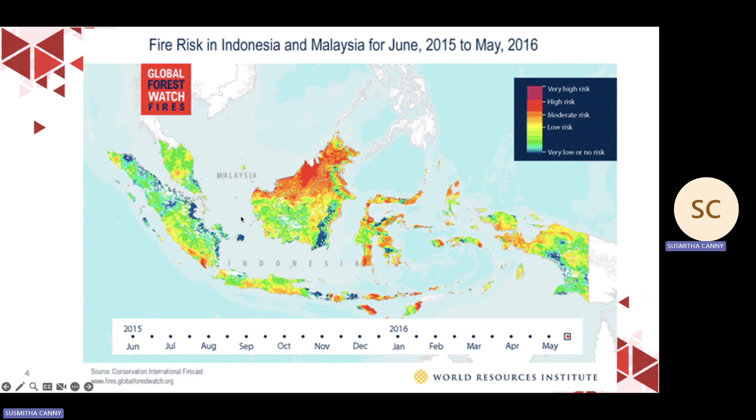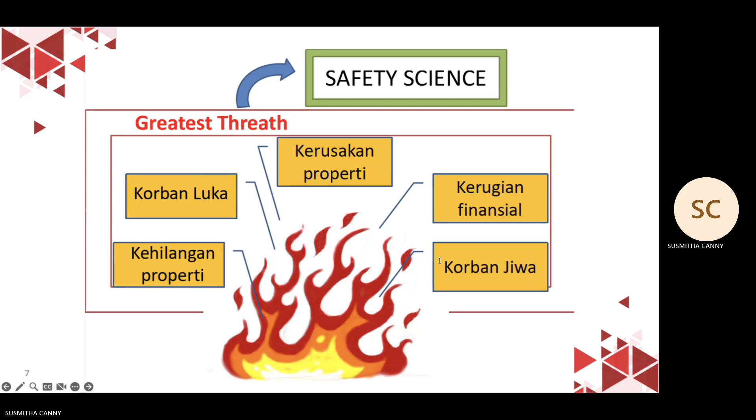From this slide, we learn about fire prevention, as prevention is better than extinguishing. Fire prevention involves taking measures to reduce the likelihood of a fire occurring, and the main focus of fire prevention is identifying and controlling hazards before a fire starts.

There are some fire prevention measures. The first is risk identification: identifying heat sources, flammable materials, and environmental conditions that may trigger a fire. The second is equipment maintenance: ensuring electrical equipment and machinery are in good condition to prevent short circuits.

The third is safe storage of flammable materials, by storing chemicals and flammable gases according to safety procedures. Then employee training, of course: educating workers on fire hazards and how to prevent them. And lastly, developing safety SOPs, by establishing safe work procedures for tasks involving heat or open flames, such as welding.

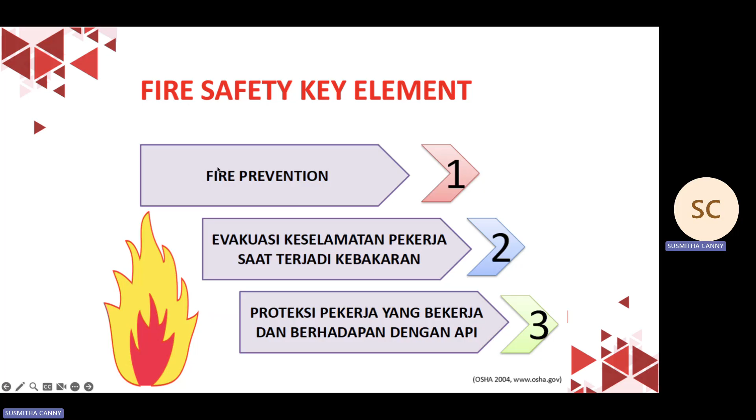So the conclusion from this slide is fire safety is not just about extinguishing fires, it's about preventing fires, ensuring safe evacuation, and protecting workers who face fire hazards directly. By implementing these three key elements, we hope that fire risk can be minimized and workplace safety can be better ensured.

And this is how we did fire prevention. In this module we have four topics. The first one is fire prevention and protection. The second one is fire control hierarchy, like we already talked before about occupational safety and health hierarchy. The third one is the OSHA fire prevention plan. And the fourth one is the fire triangle and tetrahedron.

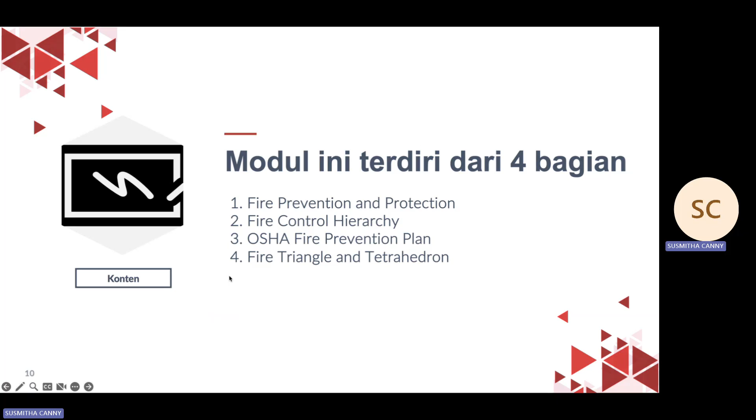We will discuss the essential aspects of fire safety: the first is fire prevention, then fire protection. Fire prevention is the effort to prevent fire from occurring in the first place. The main goal of fire prevention is to eliminate factors that can trigger fire. Based on the physics and chemistry of fire, a fire can only occur if three key elements are present, known as the fire triangle: oxygen, heat, and fuel. If one of these elements is removed, a fire cannot ignite.

However, in practice, fire prevention is not always 100% effective. Therefore, we need to understand several fire prevention measures recommended by NFPA in 1997, which include these prevention methods. However, as seen on the slide, fire prevention alone cannot 100% guarantee that fires will never occur.

That's why we also need to understand the concept of fire protection. While fire prevention focuses on preventing fires, fire protection is an integrated system to handle fires that cannot be prevented. Fire protection includes all actions taken to control, contain, and extinguish fires once they occur.

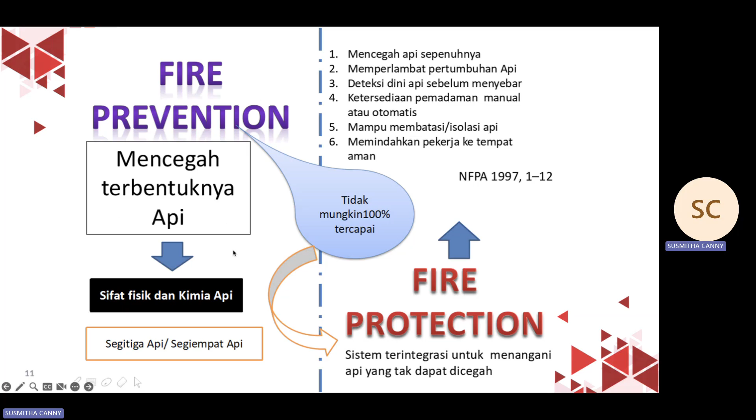This is the hierarchy of control for fire risk, like we already talked before. This can also be used for fire. Actually, this is the hierarchy of occupational safety and health. The most effective is elimination, then substitution, engineering control, administrative control, and PPE.

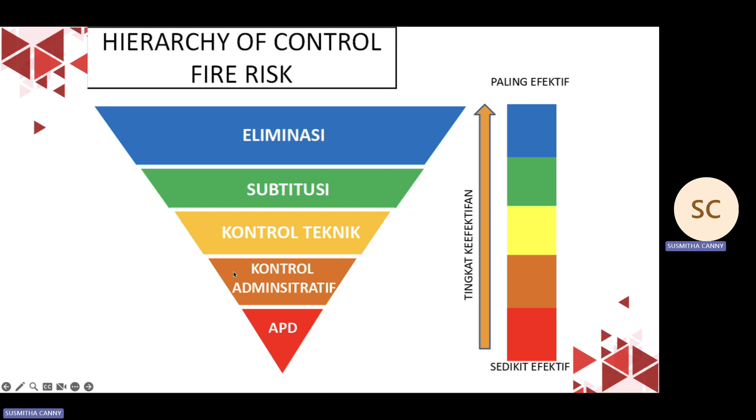On this slide we will discuss the key elements of the fire prevention plan according to OSHA. The fire prevention plan is crucial for ensuring workplace safety and reducing the risk of fires that can cause significant losses. The first thing we need to do is list major fire hazards. This is the first step in fire prevention planning: identifying the potential hazards that could cause a fire.

The second step is procedure for controlling flammable waste. One of the causes of fire is the accumulation of flammable waste, so there must be a clear procedure for managing such waste, such as providing designated storage areas, using sealed containers, or disposing of waste regularly. The third step is designating personnel responsible for equipment maintenance to ensure that fire protection systems function effectively. The fourth one is designating personnel responsible for fuel management, since in addition to equipment, fuel must also be properly managed.

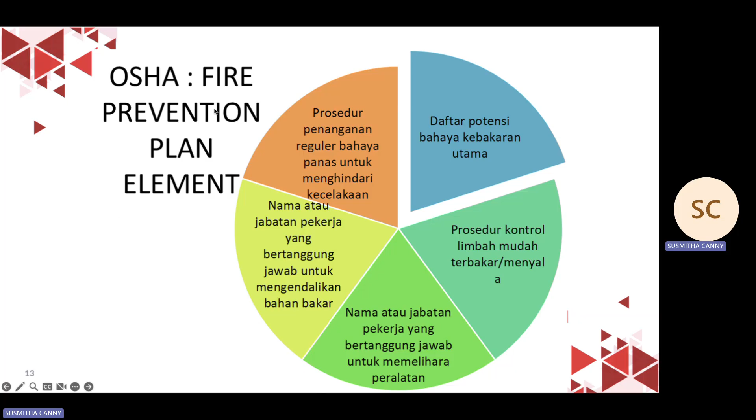This organization recommends that specific personnel be responsible for storing fuel, regulating the amount of fuel, and ensuring there are no leaks or spills that could ignite a fire. The last one is regular handling procedure for heat hazards to prevent accidents. Lastly, the fire prevention plan must include procedures for handling heat sources, ensuring hot tools like welding equipment and stoves are used safely, keeping a safe distance between heat sources and flammable materials, and also providing training for workers.

Before we dive deeper into the elements of the fire prevention plan, let's first understand the fundamental concept of how fires occur. In ancient times, fires were explained using the fire triangle concept. As I already talked about before, it consists of three main elements: oxygen, heat, and flammable fuel.

But right now, in recent years, it's recognized as the fire tetrahedron, which adds one more element: chemical reactions. The fire tetrahedron consists of oxygen, heat, fuel, and chain chemical reactions. This chemical reaction is what sustains the fire. So even if we remove fuel or oxygen, but the chemical reaction continues, the fire may still burn or spread.

This image explains combustion as an oxidation reaction that produces heat, flame, and smoke. Simply put, combustion is a chemical reaction between fuel and oxygen, releasing energy in the form of heat and similar effects. There are also factors affecting combustion, like the state of the fuel, combustion rate differences, and choosing the right fire extinguisher.

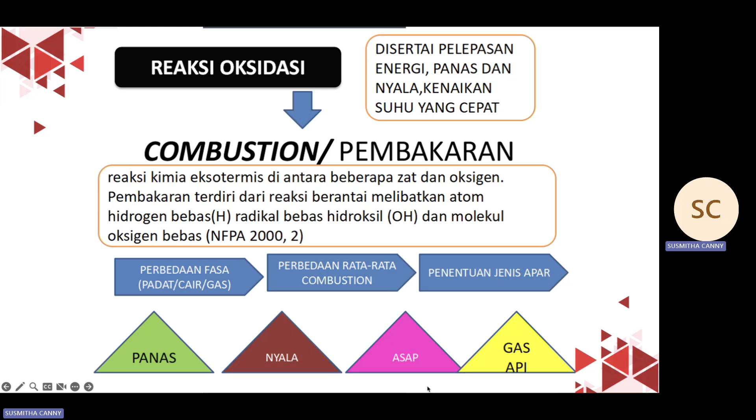As maybe you know, a wet cloth can be used to extinguish fire. How does a wet cloth do that? It's because it blocks oxygen, since oxygen is part of what causes a fire. Fire requires oxygen to keep burning, and a wet cloth acts as a physical barrier, cutting off the oxygen supply to the fire and stopping the combustion process.

Another reason is that the wet cloth can absorb heat. This method is effective when the fire is small and the fire source can still be fully covered by the wet cloth. For clothing fires, a fire blanket or wet cloth can help prevent further spread. It will not be effective if the fire is too large, or for chemical or electrical fires, large oil fires, or chemicals in dangerous places with hot oil. So the conclusion is a wet cloth can reduce oxygen and absorb heat, but it should be used cautiously depending on the type of fire.

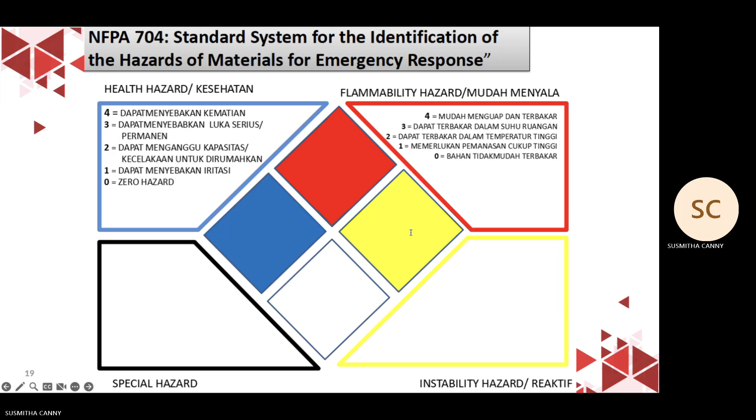The next topic is fire control, how we control fire by using a standard system for hazard identification. This is from the NFPA. They have a standard system for identifying chemical hazards in emergencies. They have four colors, and each color represents a different type of hazard, representing the level of health risk posed by the material. This is how we do fire control.

This is how we do the fire tetrahedron concept. They explain that fire can ignite and sustain itself due to the presence of four main elements. To extinguish a fire, one or more of these four elements must be removed. Below are some fire suppression methods based on the fire tetrahedron concept: water spray, carbon dioxide, dry chemical, and fire break.

For water spray, it works by cooling the heat and reducing the temperature around the fire. Additionally, water vapor can help lower the oxygen level around the fuel. For carbon dioxide, it works by displacing oxygen from the fuel surface. For dry chemical fire extinguishers, they disrupt the chain chemical reaction that sustains the fire. For fire cuts in a forest fire, this technique involves removing combustible fuel to prevent the fire from spreading further.

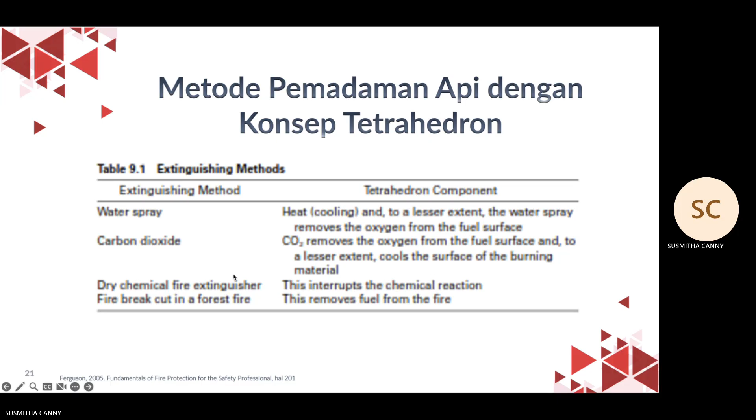This is some classification of fire based on NFPA material. Each type of fire requires an appropriate extinguishing method. There are classifications A, B, C, D, and K. For class A, ordinary combustibles, they can only be extinguished by water.

Class B, flammable liquids, can be extinguished using carbon dioxide. For electrical fires, you can only use carbon dioxide, and do not use water because it can cause electric shock. For class D, you can use a special dry powder to cover the fire and isolate oxygen, and also do not use water because some metals may react explosively with water.

And for the last class, K class, cooking oils and fats, you can use a wet chemical to extinguish. As with the previous one, do not use water because it may cause splattering and worsen the fire.

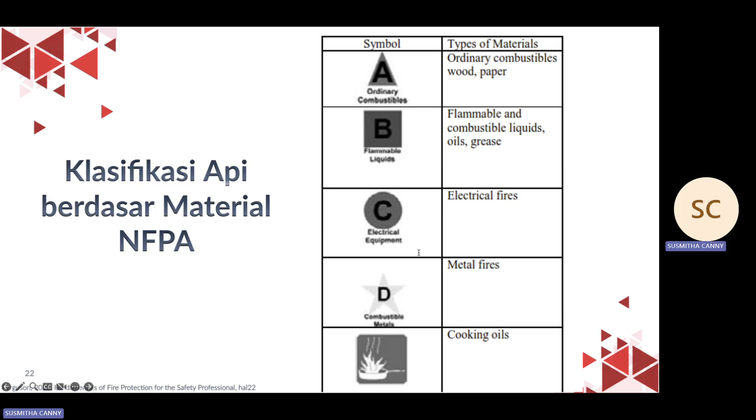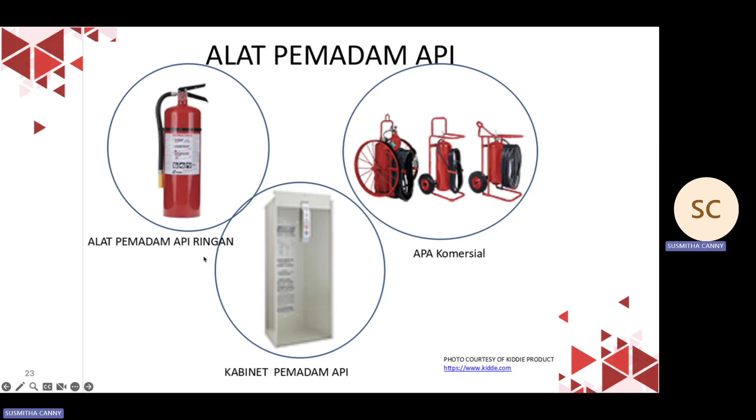This is some fire extinguishers. They have fire extinguisher cabinets also. This is a storage unit for firefighting equipment designed to provide quick and easy access in the event of a fire.

And this is some fire extinguishers from the manual until the automatic ones, kind of fire sprinkler like we have in our campus. This is an automatic system used to detect and extinguish fire by spraying water or other extinguishing agent.

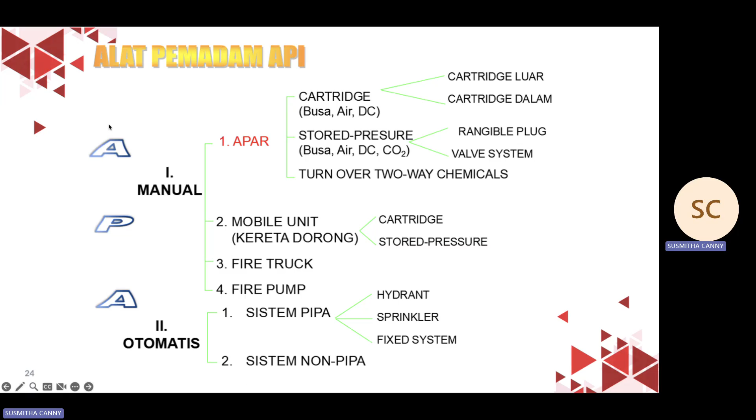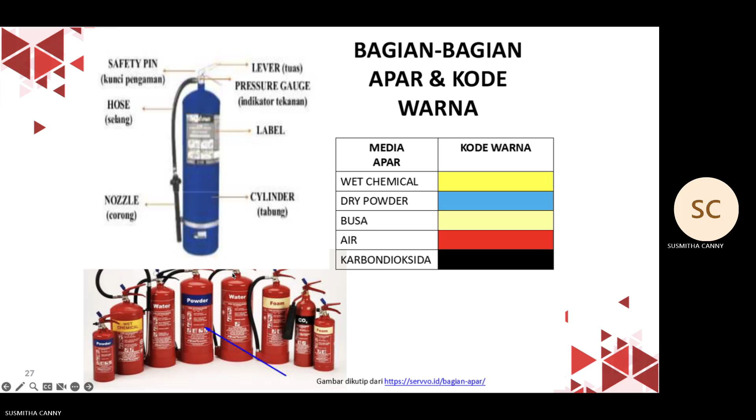The next one is light fire extinguisher (LFE) or portable fire extinguisher, or we know it as APAR. A light fire extinguisher has different kinds of types: wet chemical with yellow color coat, dry powder with blue color, and they also have water, foam, and carbon dioxide.

So make sure if you want to extinguish some causes of the fire, you need to make sure with the portable fire extinguisher that you can use.

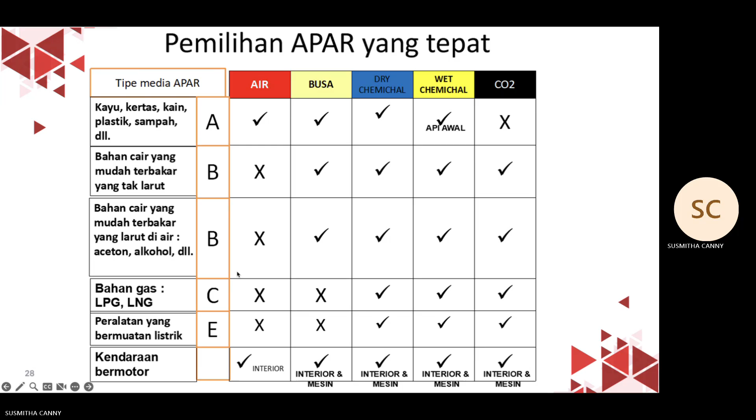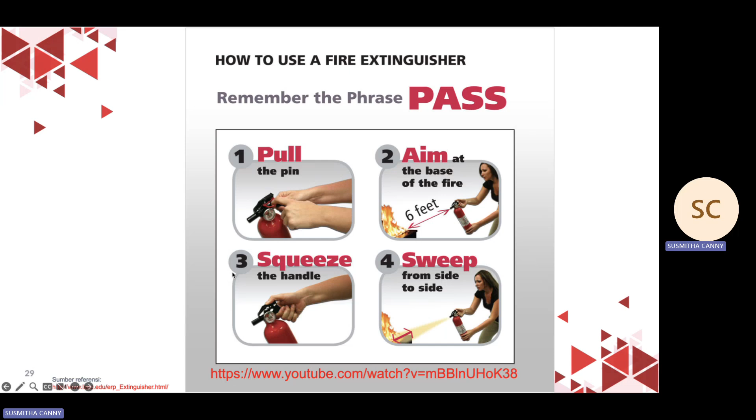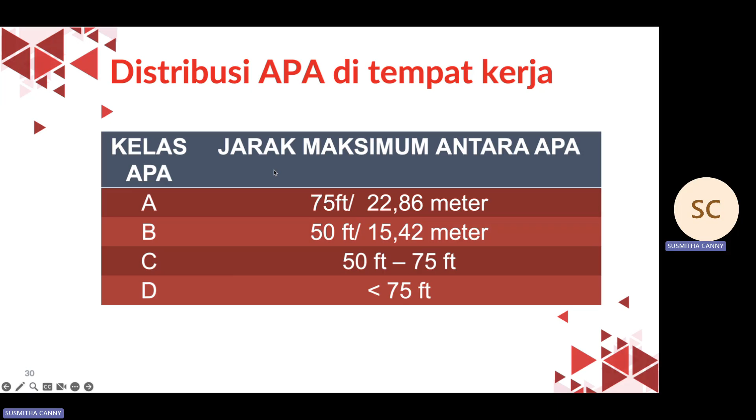And this is how to distribute portable extinguishers based on the maximum distance between the devices, for the portable extinguishers. So in each class they have different distance, and this is the way how to maintain the fire extinguishers.

So you have three kinds of maintenance. The first one is inspection maintenance, the second one is routine maintenance, and the last one is regular inspections.

The second to last module we want to discuss is fire evacuations. This is how you do life safety requirements, fire safety key elements based on what we already mentioned before. When a fire occurs, workers must immediately exit the hazardous area through designated evacuation routes, and this process is called means of egress, which consists of three main parts: exit access, the exit, and exit discharge.

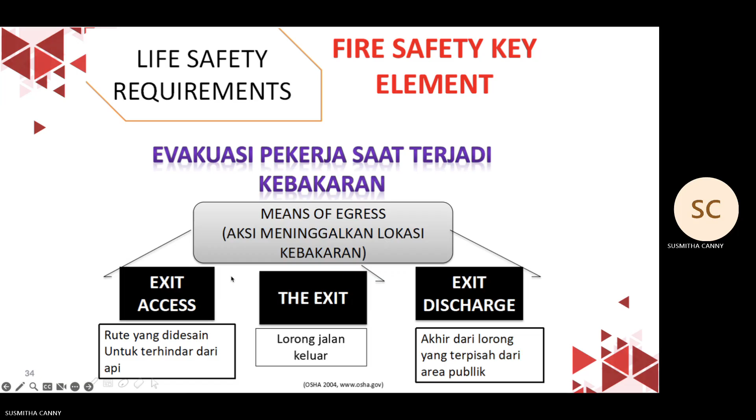This is the behavior of humans when they face fires. They have three kinds of behavior: the first one is convergence clusters panic, the second one is panic behavior, and the last one is re-entry behavior.

The last module is about protection for workers working with fires. They have two kinds of topics: exposure to hazards in emergency situations, and work safety system according to regulations.

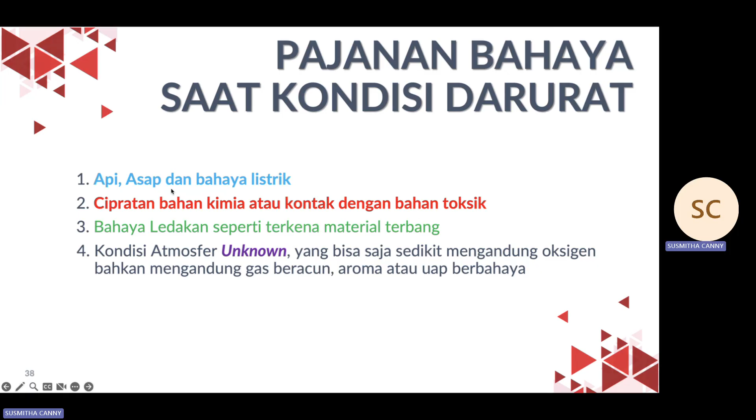This is some agents that may be hazards in emergency conditions. The first one is fire, smoke, and electrical hazards. The second one is chemical splash or contact with toxic substances. The third one is explosion hazards and flying debris. The fourth one is hazardous atmosphere, kind of unknown atmospheres, maybe a lack of oxygen, the presence of toxic gases like carbon monoxide, and chemical vapors or fumes that can damage the respiratory system if inhaled for too long.

This is a decree of the Minister of Public Works number 10/KPTS/2000. The building layout planning and fire protection system include site planning, rescue facilities, active protection system, and passive protection system. Each part has its own explanation.

You can try to take a deeper look by yourself. The conclusion from this slide is that the implementation of the system is crucial, especially for preventing, controlling, and managing fires in buildings or workplaces to ensure the safety of occupants.

And this is for the topic today about fire hazard potentials.